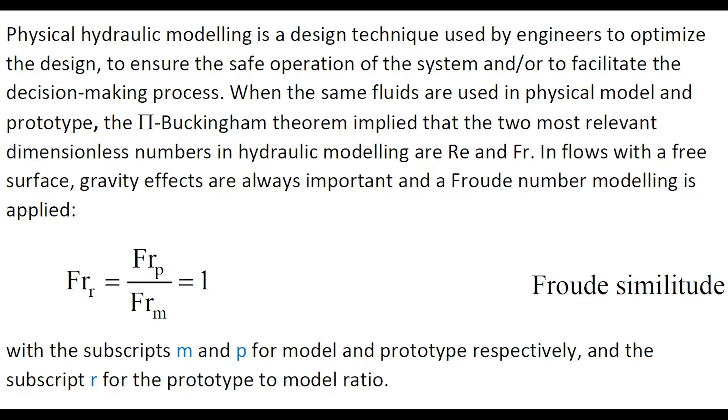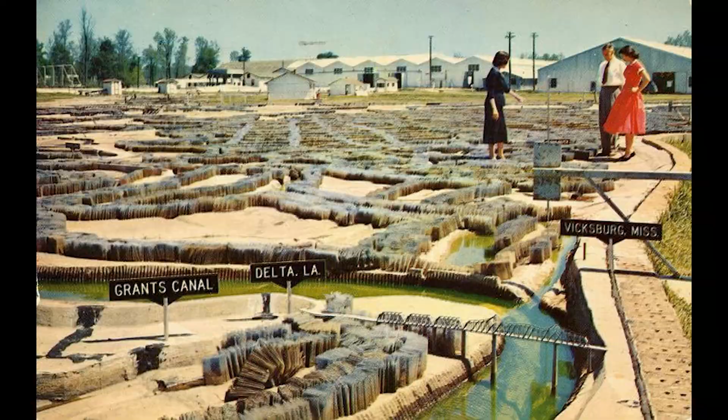In flow with a free surface, gravity effects are always important and a Froude number modeling is applied. A Froude number modeling is typically used when friction losses are relatively small and the flow is highly turbulent, for example overflow weir, flow past bridge piers. A main concern is the potential for scale effect induced by viscous forces, and a distorted Froude similarity may assist to reduce the risk of scale effect.

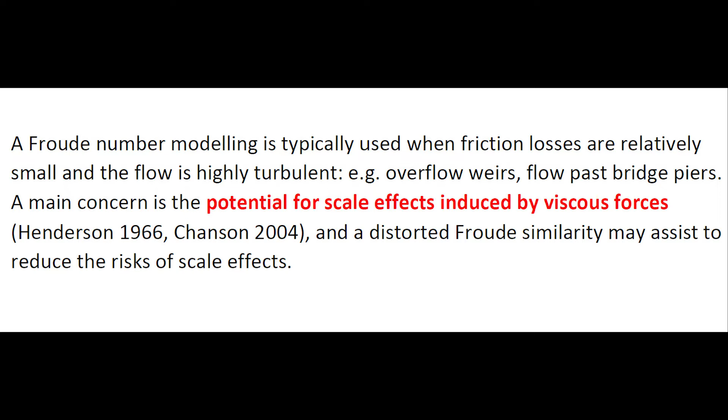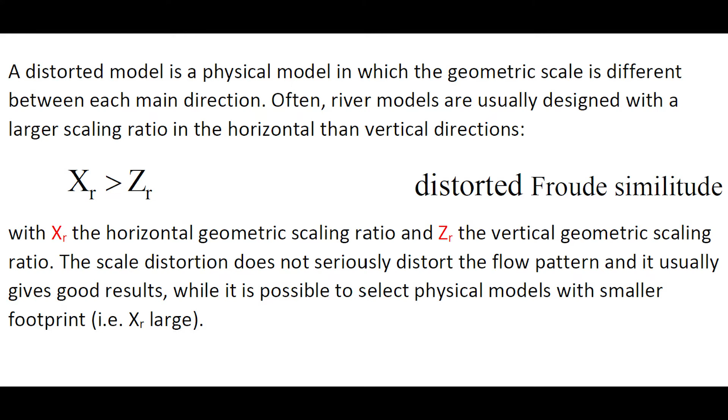A distorted model is a physical model in which a geometric scale is different between each direction. Often, river models are designed with a larger scaling ratio in the horizontal direction than in the vertical direction. That is XR being greater than ZR, XR the horizontal geometric scaling ratio, and ZR the vertical geometric scaling ratio.

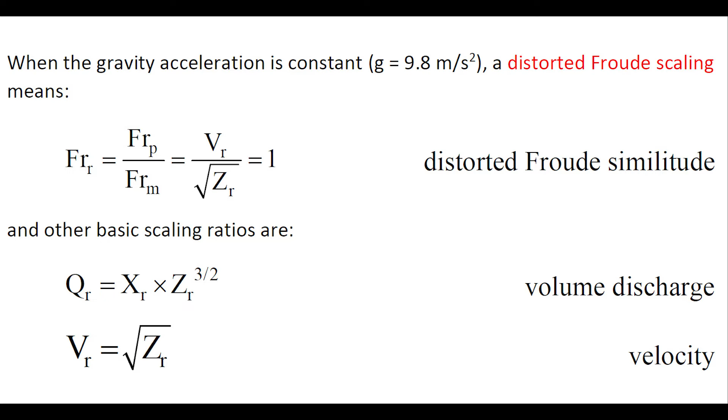In addition to the economical and practical benefits, the distorted Froude similar models have a number of advantages compared to undistorted models. The flow velocities and turbulence in the model are larger, the time scale is reduced, the model Reynolds number is larger, improving the prototype to model similarity. The larger vertical scale allows a greater accuracy on the water depth measurement.

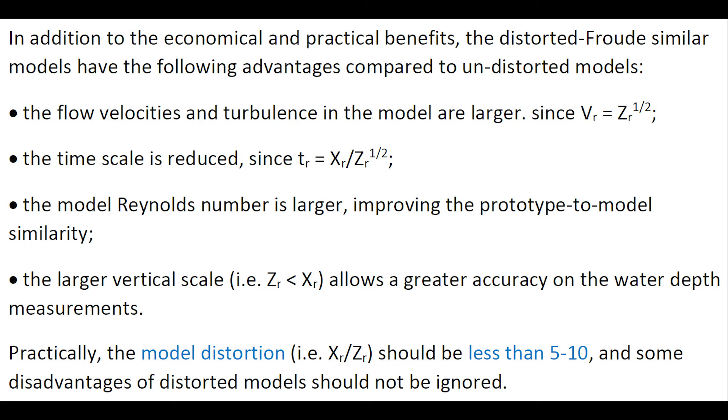Practically, the model distortion, that is the ratio XR over ZR, should be typically less than 5 to 10, and the disadvantages of distorted models should not be ignored. The modeling of flow resistance is critical. For a distorted Froude similar model, the flow resistance scaling ratio should fulfill the following relationship.

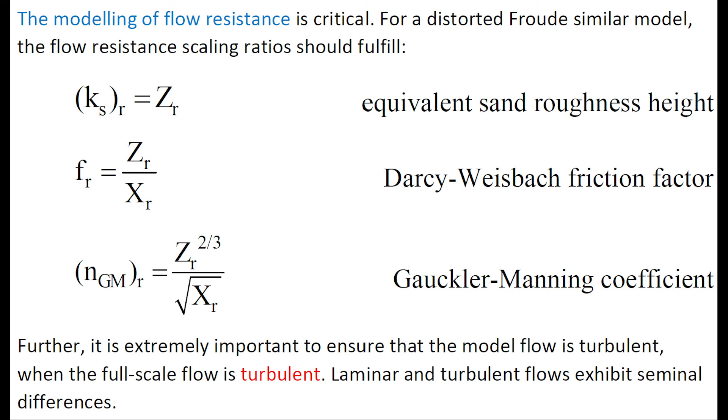Importantly, the model flow must be turbulent when the full-scale flow is turbulent, as indeed laminar and turbulent flow exhibit seminal differences. The concepts of physical modeling and Froude similitude are essential knowledge to the application of open-channel hydraulics. They are discussed in the relevant YouTube videos in the same playlist.